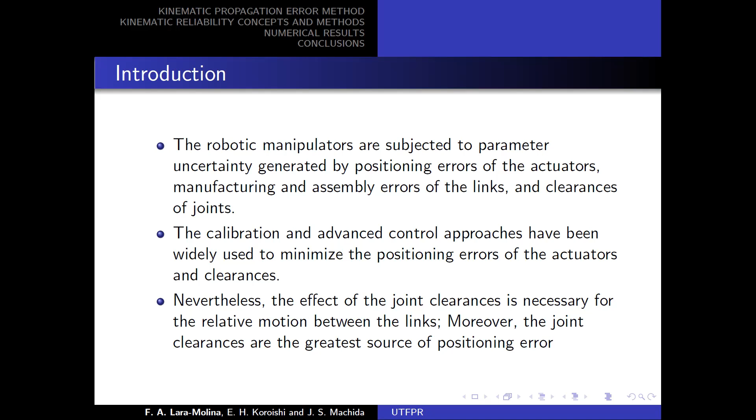The robotic manipulators are subject to uncertainty. The main source of uncertainty is the clearances of the joints. These clearances are necessary for the relative motion between the links, and the calibration and the control strategies have been used to minimize the effect of these errors. And therefore, it is necessary to develop methods that quantify the effect of these errors.

The present contribution presents a comparative study of several methods to assess the kinematic reliability of manipulators by using the probabilistic theory and the fuzzy approach. In our methodology, first, we present a method to compute the total error in the end effector produced by the joint clearances. Then the uncertain parameters of the clearances are modeled as random variables and also as fuzzy variables.

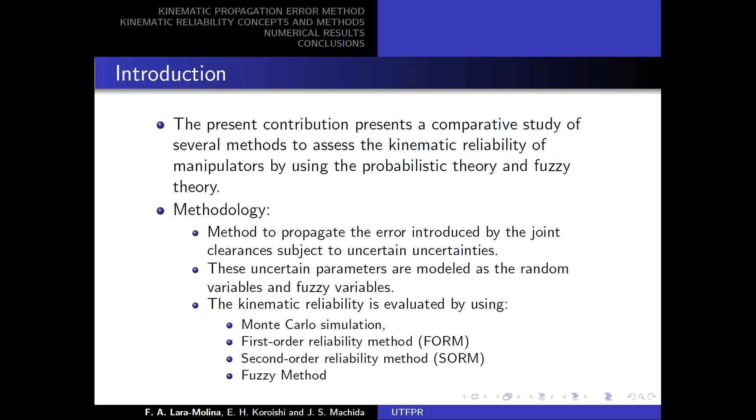And then 4 methods are used to evaluate the reliability. First, we have 3 methods based on the probabilistic approach: the Monte Carlo simulation, the first order reliability method, FORM, the second order reliability method, SORM, and the fuzzy method. Here is the outline of my presentation.

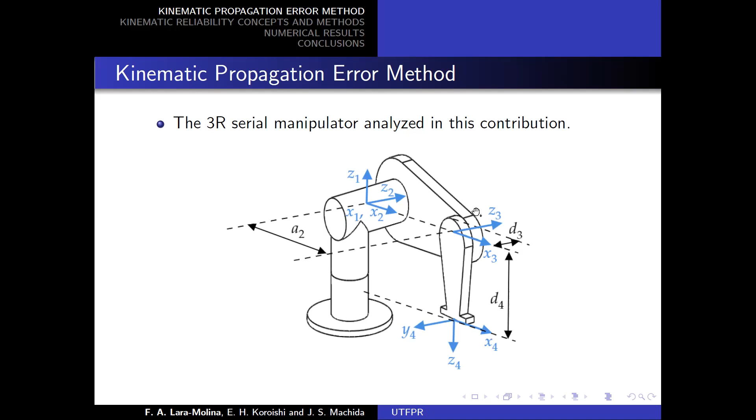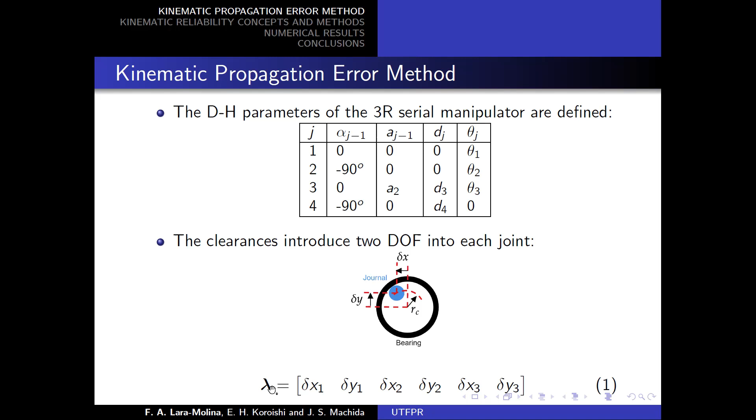The methods will be evaluated in this manipulator, which is a 3 degrees of freedom manipulator with 3 revolute joints. The DH parameters are presented in this table, and in this figure is presented the model of the joint clearances. Each clearance introduces 2 additional degrees of freedom, one displacement in the x-axis and another displacement in the y-axis, and the 3 joint clearances introduce 6 different degrees of freedom in the manipulator, set in the vector lambda.

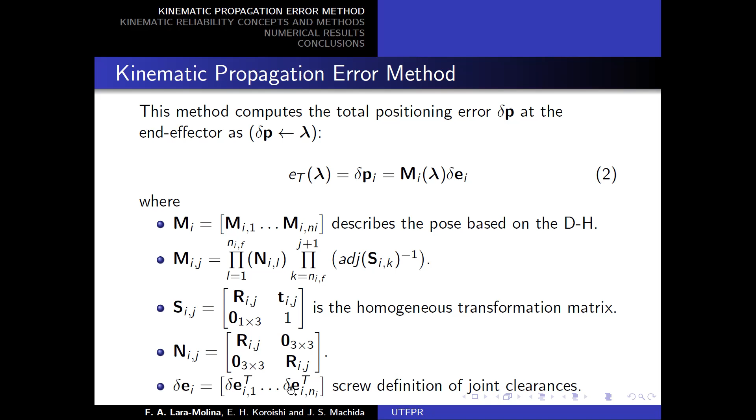First, the method to propagate the error of the clearances. I'm mapping the joint clearances in the total error of the end effector, as presented in this expression. This expression is based on the M matrix, a matrix based on the homogeneous transformation matrix that takes into account the homogeneous transformation between the frames of the manipulator, and the N matrix, which is a total orientation matrix, and delta E is the screw representation of the joint clearances.

Then the uncertain parameters are modeled as normal random parameters. Therefore, each parameter is defined by the mean and the standard deviation as presented in this expression, where omega is a normal stochastic process. And then the fuzzy parameters are modeled as triangular fuzzy variables as presented in this figure.

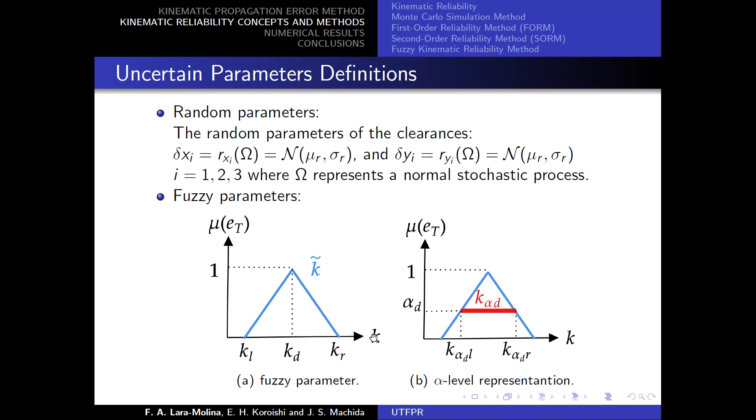The kinematic reliability expresses a measure of whether the position error exceeds the maximum error limit, as presented in equation 3. The operator Xi represents a measure of probability or a measure of possibility.

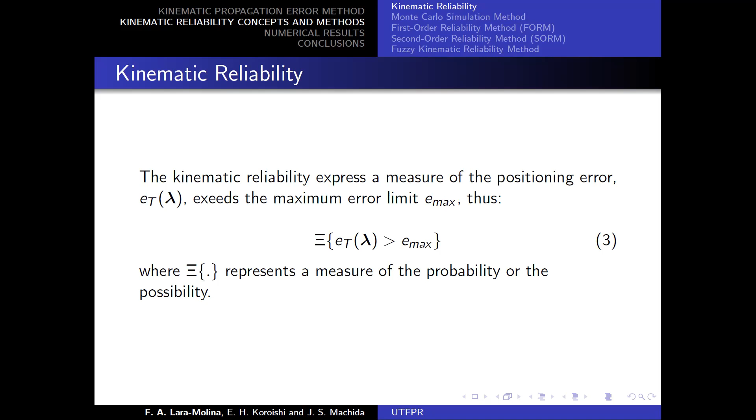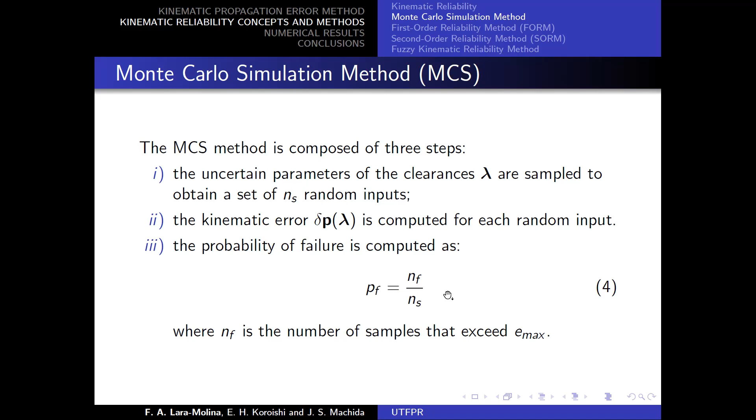The first method we have is the Monte Carlo simulation. This method has 3 stages. In the first stage, the uncertain parameters are sampled. Then the kinematic error is computed for each random input. And finally, the probability of failure is estimated as the ratio of the failure samples and the total number of samples. In this way, the probability of failure is estimated.

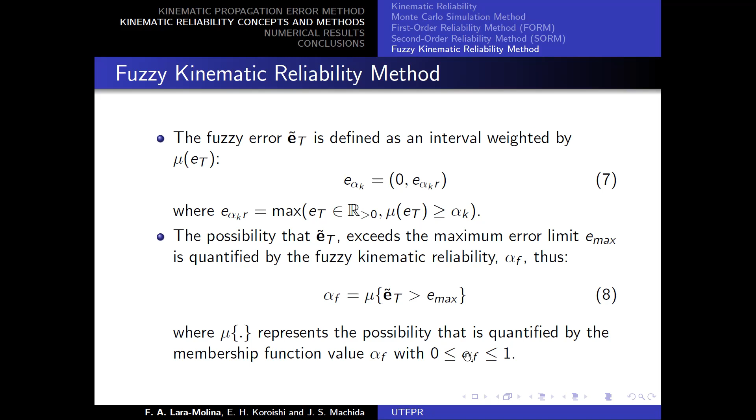Finally, in the fuzzy method, the error is expressed as intervals weighted by the membership function, as equation 7 presents. Therefore, the alpha f, which is the measure of the possibility of failure, is estimated by using the operator that represents the possibility of failure, and this estimation of the possibility of failure demands the evaluation of the membership function, a value contained between 0 and 1.

In this figure the fuzzy error of the end effector is presented, and we observe the 2 conditions: an acceptable condition and a failure condition, when the fuzzy error exceeds the maximum limit. The alpha f, possibility of failure, is estimated by using this expression, and we can see that this expression demands the solution of the optimization problem of equation 10.

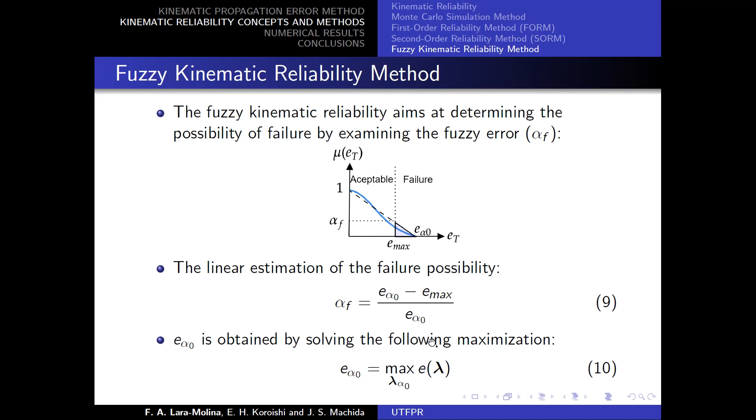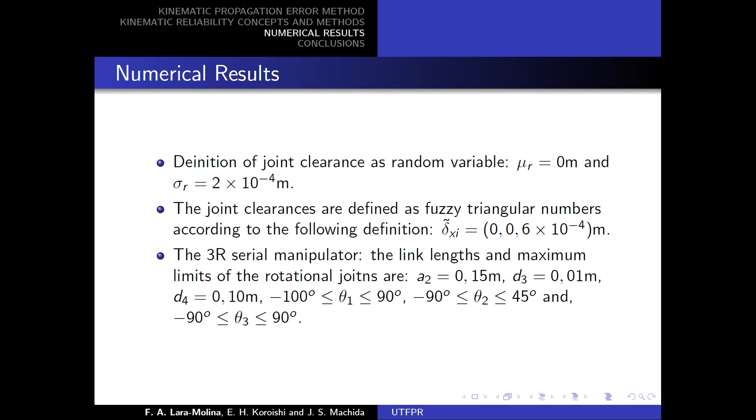For the numerical results, first, we have the parameters that define the random variables, the uncertain parameters of the joints. Then the fuzzy variables that define the fuzzy parameters of the joint clearances, and also the geometrical parameters of the manipulator with the link lengths and the maximum limits for each of the 3 joints.

In the first result, we have the estimation of the error by using the fuzzy method and the probabilistic method. In the fuzzy method, we observe the membership function of the error, pairs in blue, by considering the alpha solution of the optimization for all the values of the membership function. And in red dots, we observe a linear approximation of this membership function. We observe that the results are quite similar.

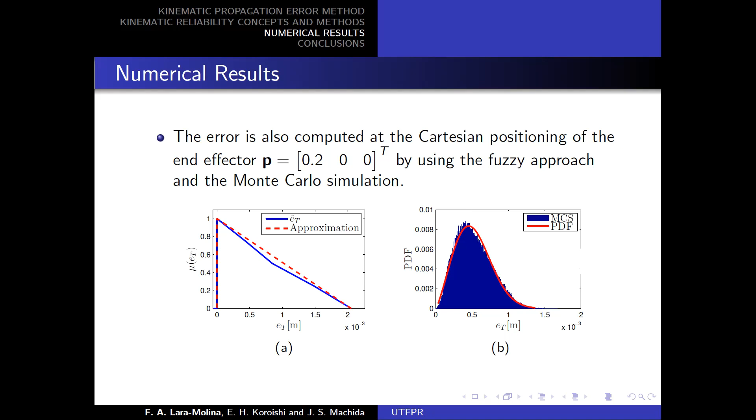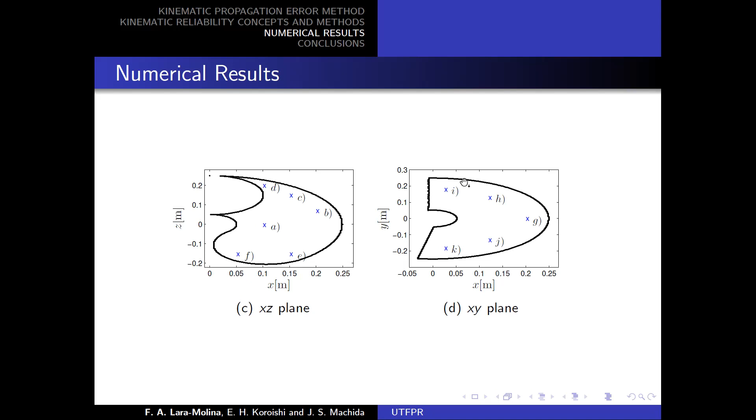Then for the random error, in the second figure, we observe the histogram of the error and the approximation of the density function, and the results also have a great agreement. Then we evaluate the workspace of the manipulator in the XZ plane and in the XY plane, and we evaluate the kinematic reliability for 11 different positions as presented in these figures.

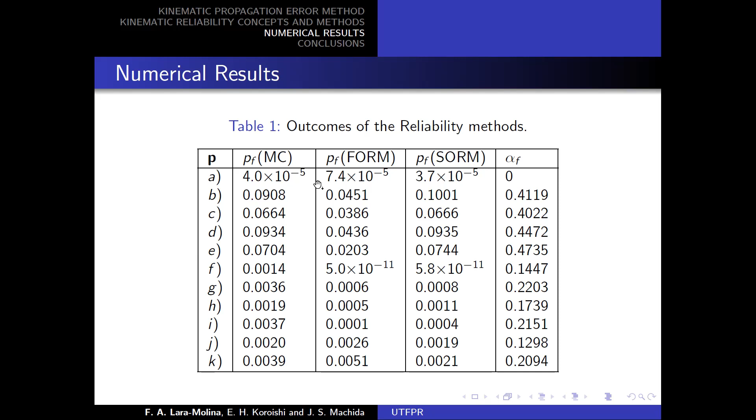In this table, we can observe the probability of failure obtained by using Monte Carlo simulation, FORM and SORM. We observe an agreement between these three methods. Nevertheless, in some positions there are some differences, and we can observe that the SORM method corrects the differences between FORM and the Monte Carlo simulation. The Monte Carlo simulation is our baseline to evaluate the probability of failure, and we observe good results for both methods.

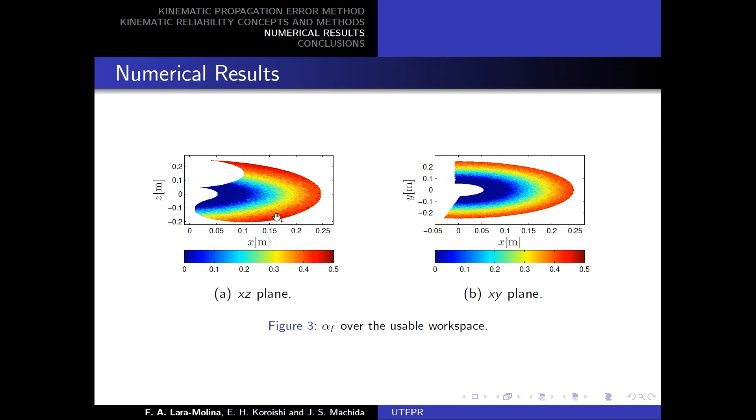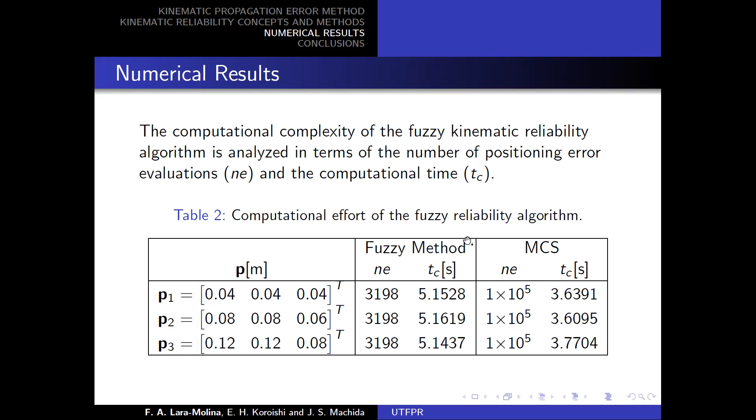Then the probability of failure is evaluated for the workspace, and we observe that the probability of failure increases in the outer border of the workspace. This is because the manipulator is completely extended. We observe a similar behavior considering the fuzzy method, as presented in this figure. Then we evaluate the computational complexity, and we observe an agreement between the two methods in the computational cost.

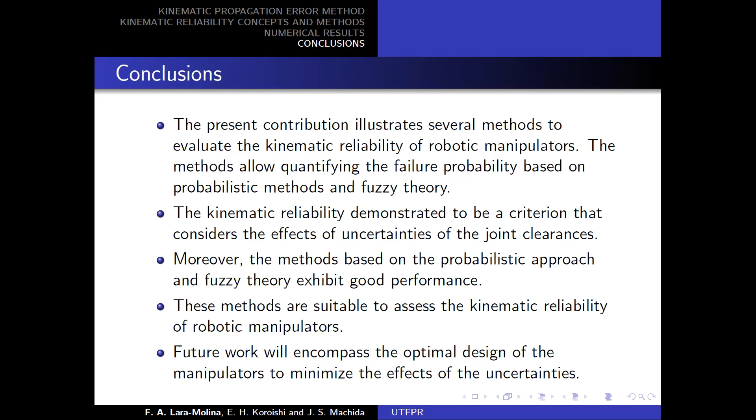As a conclusion, we observe that the methods using the probabilistic and fuzzy approaches have good results. The kinematic reliability is a criterion that is used to evaluate the kinematic performance of the manipulator. And as future work, we will use these methods for the optimal design of the manipulator.